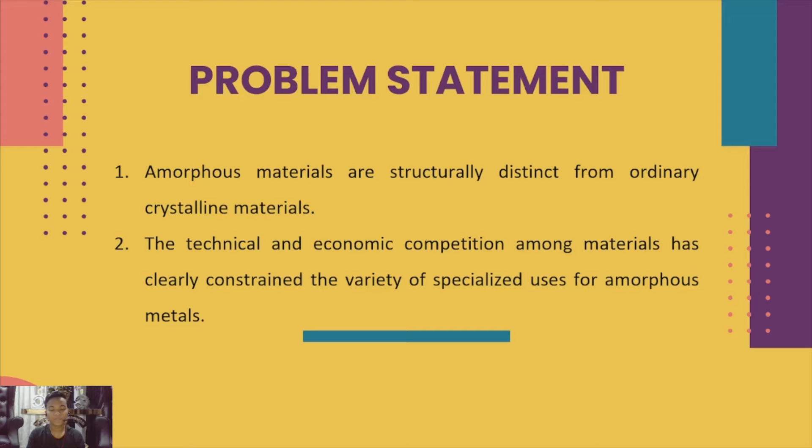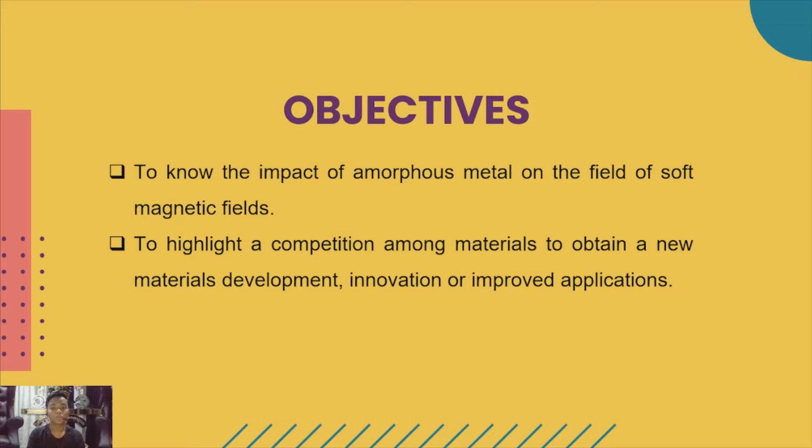Next, we continue to the objectives of this topic. The first objective is to know the impact of amorphous metal on the field of soft magnetic fields. The second objective is to highlight competition among materials to obtain new material development, innovation, or improved application.

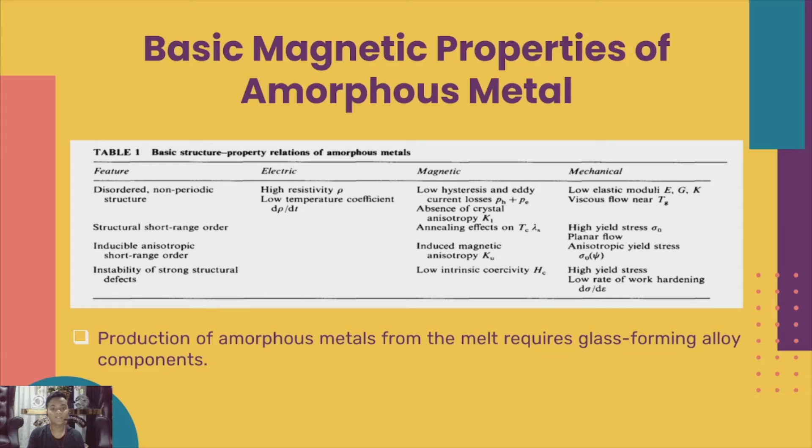For the methodology, basic magnetic properties of amorphous metal. Table 1 shows the basic structure-property relation of amorphous metals. Because of the non-periodic structure of amorphous metal, there is no magnetocrystalline anisotropy. Since defects with strong magnetic interaction are unstable in amorphous structure, their intrinsic coercivity is small. Both of these features contribute to amorphous metals' natural soft magnetic behavior. Production of amorphous metal from the melt requires glass-forming alloy components such as the metalloids boron, silicon, carbon, and phosphorus, or the metals titanium, zirconium, and others.

For figure 2, composition dependence of the magnetostriction constant for some crystalline and amorphous soft magnetic materials. As illustrated in figure 2, the magnetostriction constant may pass through zero at a certain alloy composition, but this composition may not be favorable for other properties such as a small magnetocrystalline anisotropy.

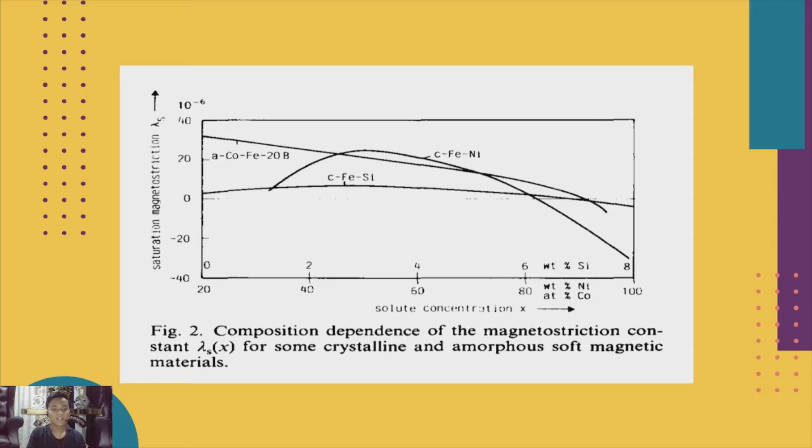For figure 3, the magnetization curve of an amorphous alloy in three states of annealing, in longitudinal and transverse magnetic field, and for partial crystallization. This represents a significant step towards achieving decreased permeability as a result of stress-induced anisotropy. Because of the decrease in specific volume of the crystallized surface layer, controlled crystallization permits compressive internal stress to be created in the amorphous ribbon.

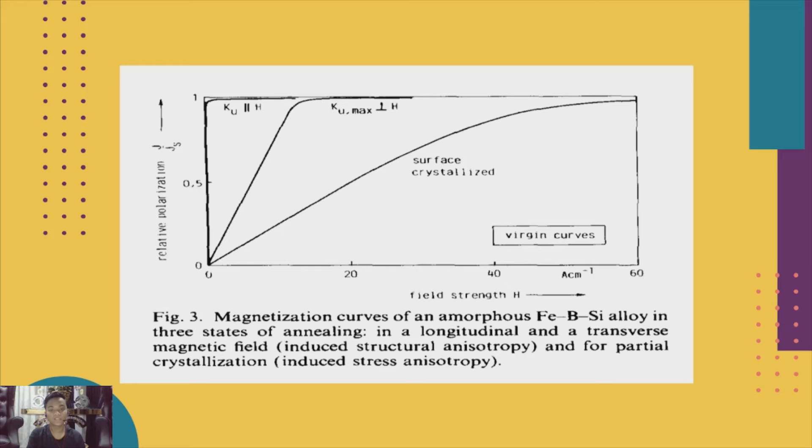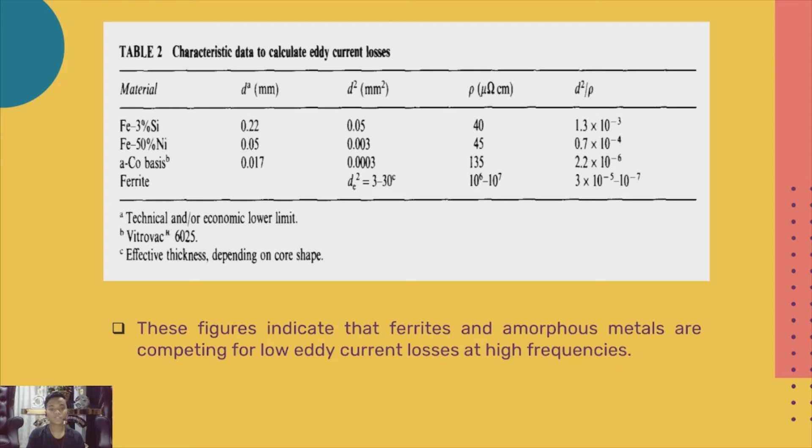Next, table 2, which shows characteristic data to calculate eddy current losses, including the effective thickness and resistivity of soft magnetic ferrites. These figures indicate that ferrites and amorphous metals are competing for low eddy current losses at high frequency. The relative magnitude of loss plays a major role in material selection for both electronic and electric power applications.

Next, we move to the results. The first result of this topic is soft magnetic materials in electronics. Lowest possible power losses are the most important criteria for the selection of magnetic core materials in electronics. Amorphous metals commonly compete with ferrites because operating frequencies are in the kilohertz range and nearing 1 megahertz. Finally, it should be emphasized that the temperature dependency of all magnetic characteristics plays a significant role in component design, since significant differences occur between room temperature and characteristic working temperatures such as 80, 100 or 120 degrees Celsius. With respect to this point, suitable amorphous materials have proved to be superior to ferrites.

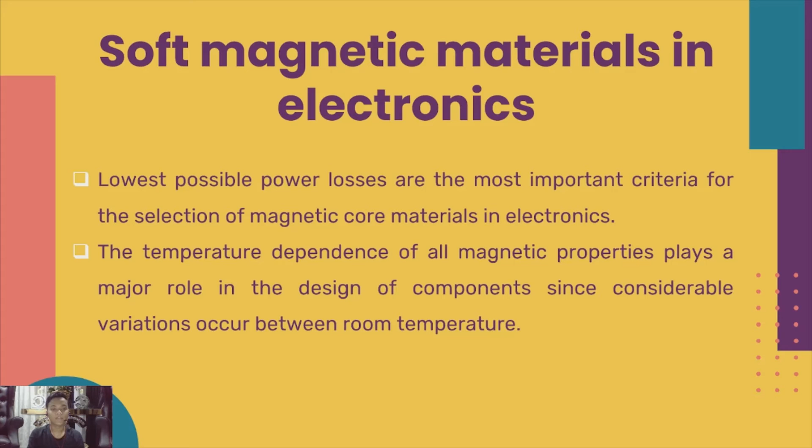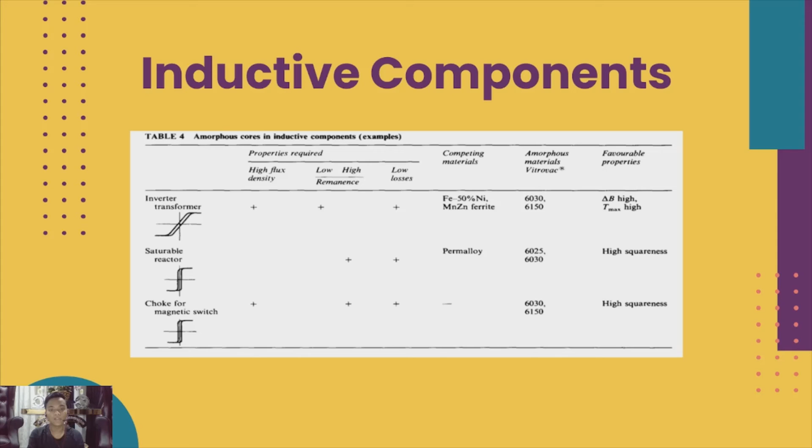Saturable reactor cores are another example where the hysteresis loop must be very square. They are used in a variety of applications, most notably as magnetic amplifier cores to regulate the output voltage of SMPS. To obtain high efficiency, the remagnetizing drive current should be small, which requires low coercivity. Apart from high hysteresis squareness, low dynamic losses of the core are clearly important in this application, which can be best addressed by thin ribbons of amorphous metal.

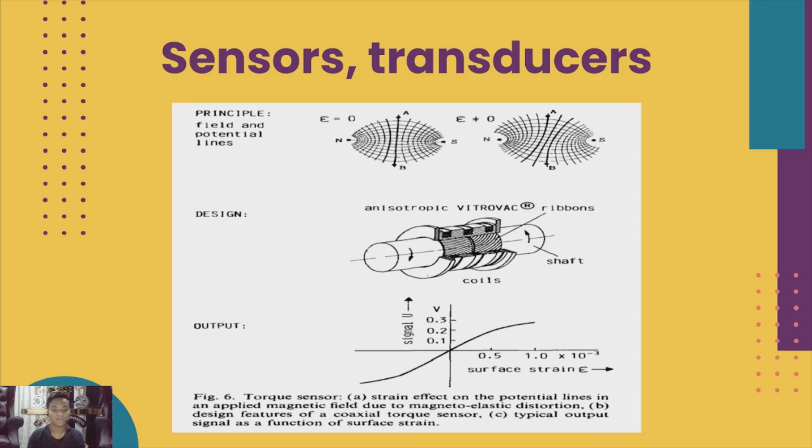The second result is soft magnetic materials in electrical engineering. Most electrical engineering applications require a high flux density paired with minimal power losses at 50 or 60 Hz mains frequency, or at significantly higher frequency. In amorphous metals, dilution by glass-forming elements decreases the average magnetic moment. Compared with classical alloys, their losses are substantially lower. This has been the primary influence of amorphous metal, notably their usage as alternate core materials in distribution transformers.

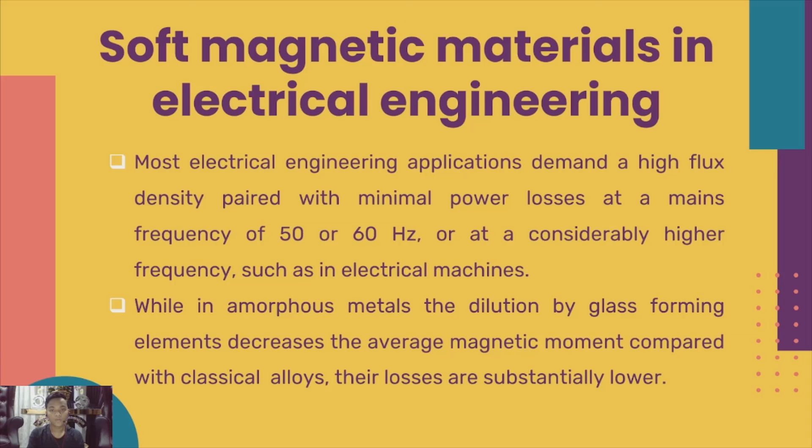For the last part, we come to the conclusion of this topic. The introduction of new and better materials in this field of application depends not only on their immediate technical and economic advantage. Certain critical economic elements are somewhat beyond the power of the material scientist and electrical engineer. Although this work focuses on amorphous metals and their application, it also emphasized the complexities of material selection and optimization. The major goal was accomplished, which is to highlight material competitiveness as a driving force behind both new material breakthroughs and innovative or enhanced applications.